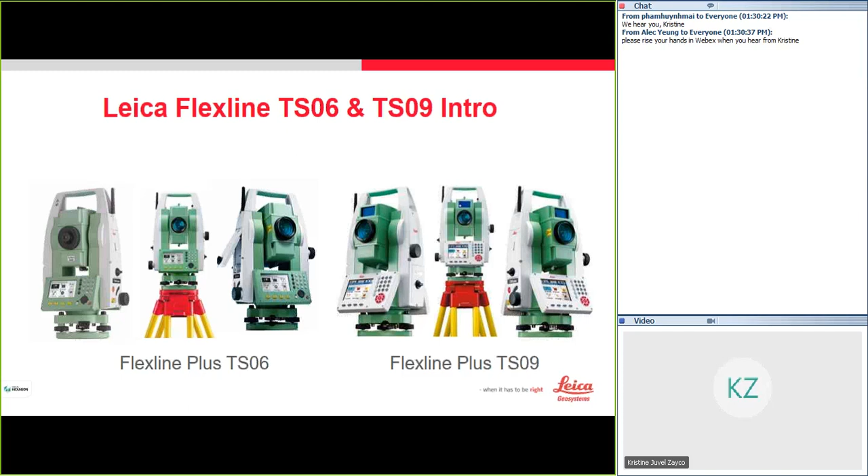So I have put here the reasons why we choose Leica Flexline Plus. The first reason is true quality. What does it mean? It covers the product design, which is made with high robustness due to the specific and dedicated product design, optimized for surveying and construction segments with the highest reliability, and it has high quality Leica optics.

The other thing is the experience. Being Leica, we have close to 200 years of experience in manufacturing world-class surveying equipment. And the other thing is true global coverage. With our 250 support and service centers, we are covering every continent, so we make sure that all our customers are really taken care of when they need us.

There are our support and information hotlines also. We have our regular training courses, informative seminars, and we do web broadcasts, just like what we're doing right now. The other reason is we have customer support, which covers every continent, with 250 support and service centers covering the whole world.

So to continue, now we're covering the hardware features, like the Flexline TS06 and 09. They have electronic distance measurement, the EDM range with prism up to 3,500, with an accuracy of 1.5mm as I mentioned previously, and the measuring time is 1 second.

For non-prism, we have a range of 500 meters, and they could also choose a long range option of 1,000 meters with an accuracy of 2mm plus 2ppm. The measuring would depend on the object, the observation situation, and the environment conditions.

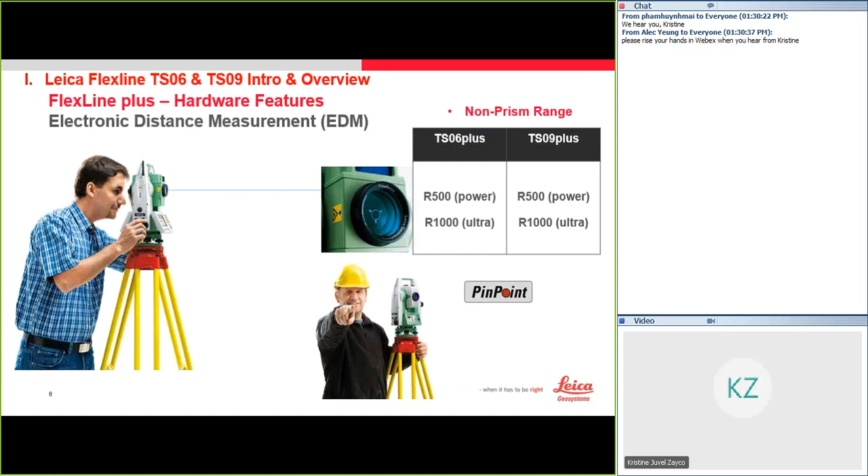Another advantage of our EDM is the non-prism pinpoint technology. When we say pinpoint technology, what does it mean? It means that wherever you point the laser, that's where the reading comes from. You can measure walls, corners, and even inaccessible points without any special applications.

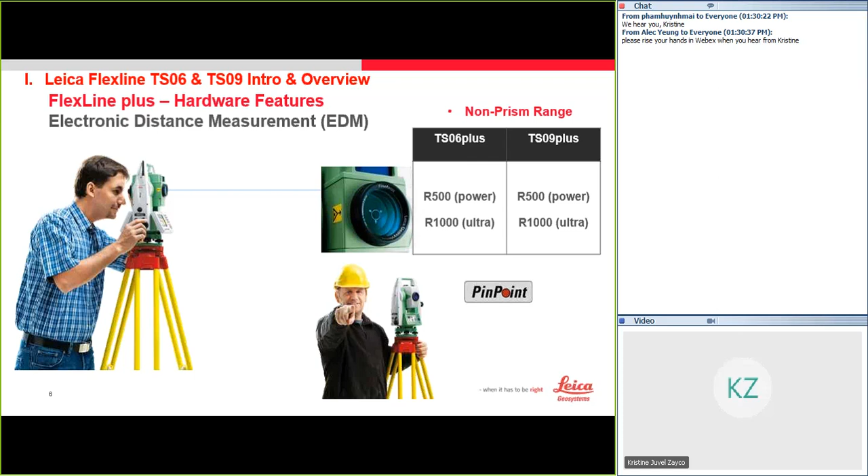We have the highest degree of pointing and measurement accuracy, the smallest laser dot, and we can always rely on it when measuring in the hardest conditions, like rain, fog, snow, and even with multiple targets. So far it is the market's best EDM in combination with range, accuracy, laser dot size, and measurement time.

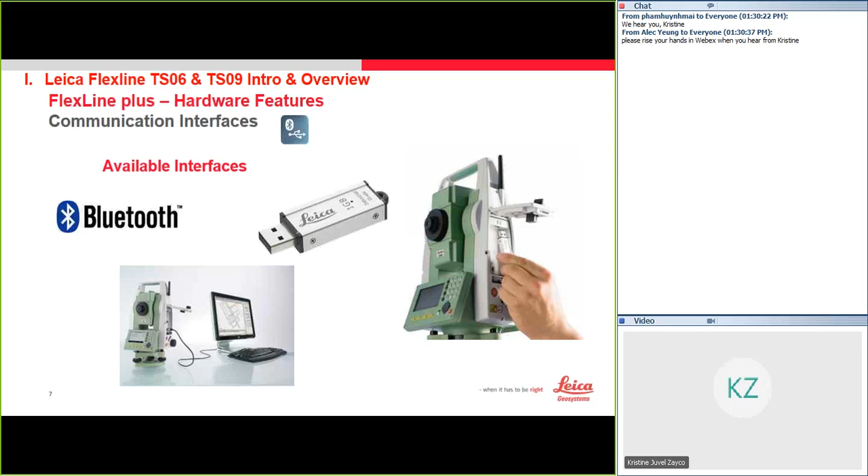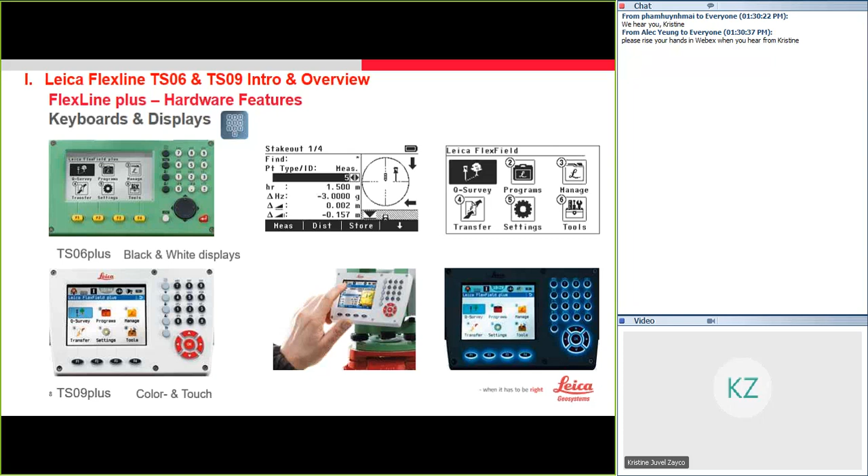So the other additional features are this. As you know, it has two function trigger keys, which allow you to measure and get all the distance at the same time, and of course the two user definable keys, so you can define the keys that you always use. And of course our endless horizontal and vertical drive, and even the IP55 also. So these are all the additional hardware features in our TS06 and TS09.

Hello, sorry for that. The other additional feature is the theft protection. This additional feature is for security reasons. So how does it help our customer? This prevents an unauthorized person from using the instrument, and your data will be protected also, and it makes your instrument unattractive to steal, or even lowers your insurance cost for this instrument.

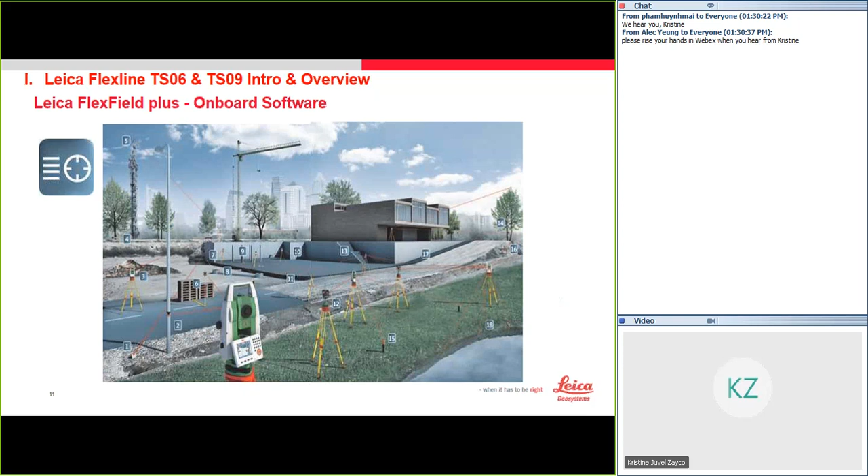So let's continue with these applications, the onboard software. I won't go through all these apps, but just some basic ones that most surveyors use. The station setup is a program for when you want to set up your station, to determine your station coordinates and your station orientation. In this station setup, you will have a maximum of 10 unknown points that can be used to determine the position and orientation, using different methods.

The other thing, of course, is survey. Survey is a program you use if you want measurement of a limited number of points. With this, you need to do the pre-setting for the job, station, and orientation prior to beginning your survey.

The third one that I want to explain more is the stakeout program. This is a program used to place marks in the field at predetermined points to be staked. These points to be staked may already exist on the job, on the instrument, or can be manually entered also. The program continuously displays the difference between your current position and the desired stakeout point, so you can see how far you are from the stakeout point, or whether you are already on that exact point.

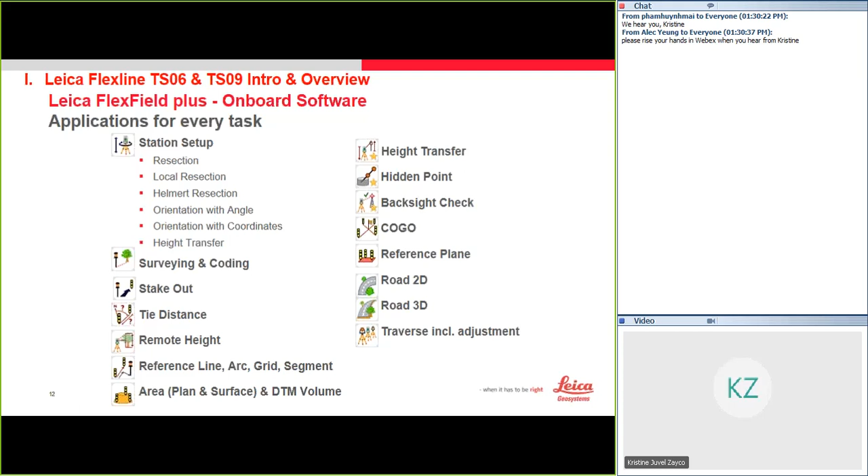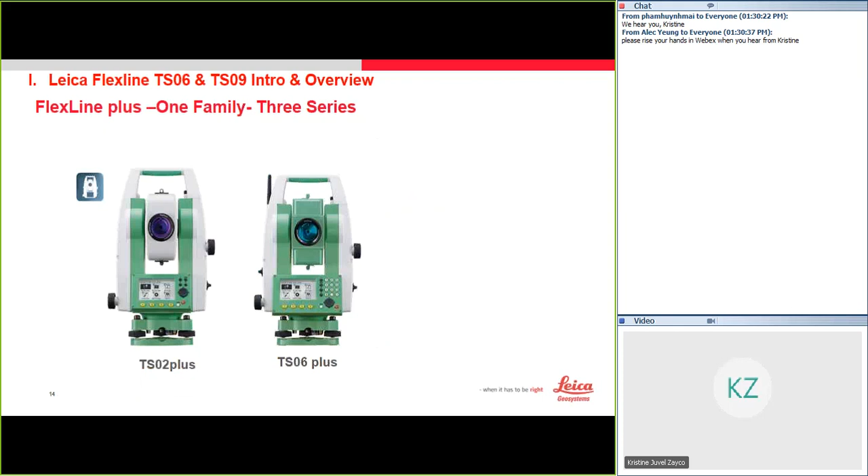I won't go through all the applications onboard, so let me continue to the Flexline Plus, which is one family with three series. Looking at this product series, we could see how it evolved, from black and white with a simple keyboard to a colored display and alphanumeric keyboard. This is the evolution or development.

So one of the reasons we use Leica Flexline is the true flexibility, even for the affordability of customers. If you have a tight budget, you can use just simple feature requirements, then you can have the range of TS02 to TS06. If you have higher requirements and a better budget, then you could choose the TS09 Plus.

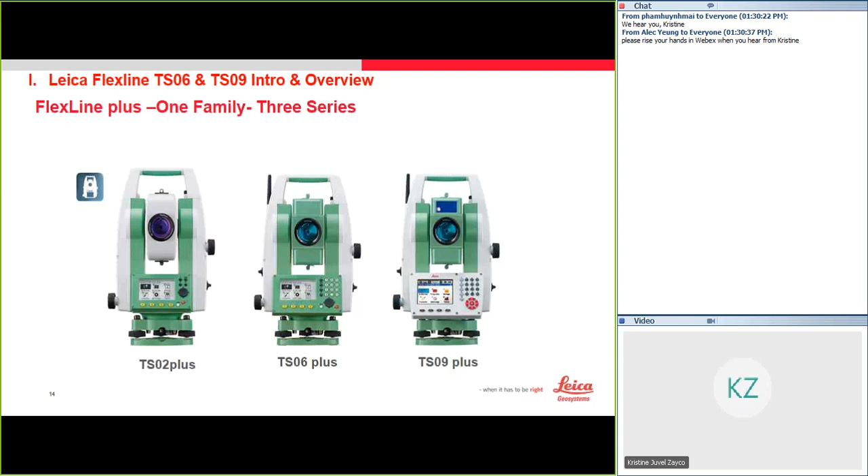So let me describe each of this family. The first one in the series is the Leica TS02. It has the minimum features among the three, but that doesn't mean the quality and precision are not there. It's Leica quality with proven specifications, a reliable instrument, and the highest EDM precision also.

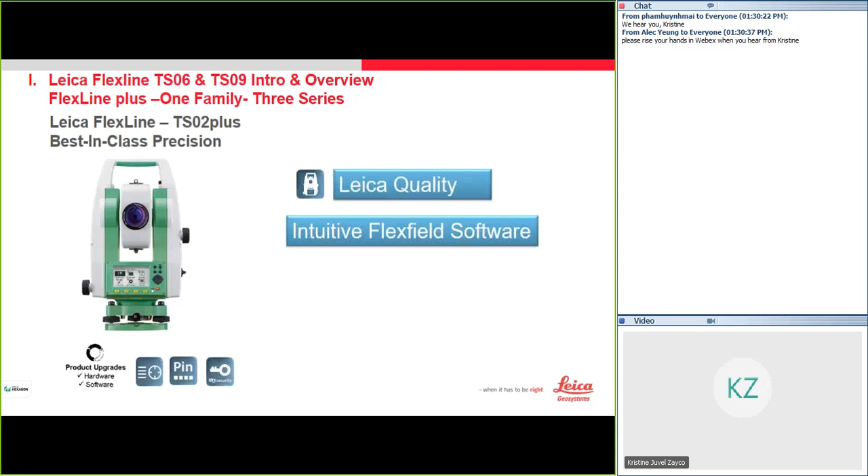TS02 also has this intuitive FlexField software, which means a low learning curve due to the guided workflow and easy to understand graphics and icons, and faster operation due to the graphics. The keyboard uses the standard minimum number of keys for maximal overview. So this is the Leica Flexline TS02.

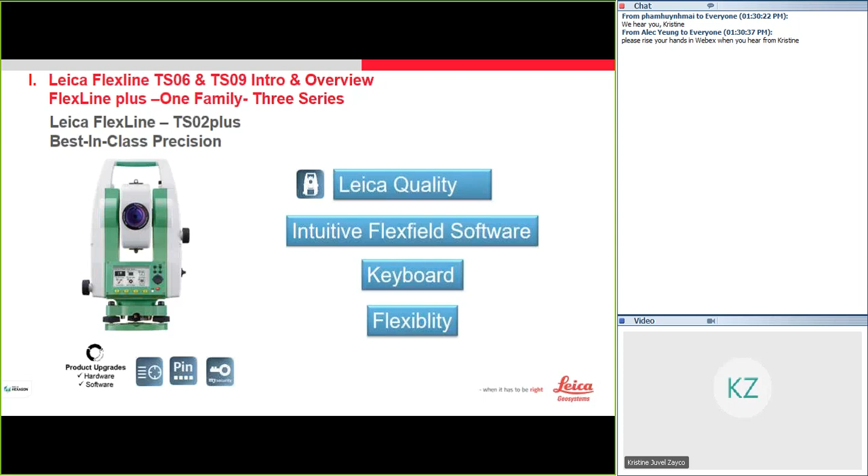And of course, it's flexible, so you can choose from various hardware and software options.

So the next in the family series is the TS06 Plus, which we call precision with high efficiency. It covers the FlexField software, meaning it has an enhanced application package with optional applications, depending on your requirements or the end user's requirements. The hardware also has an advanced black and white keyboard which is fast and error-free because it's alphanumeric.

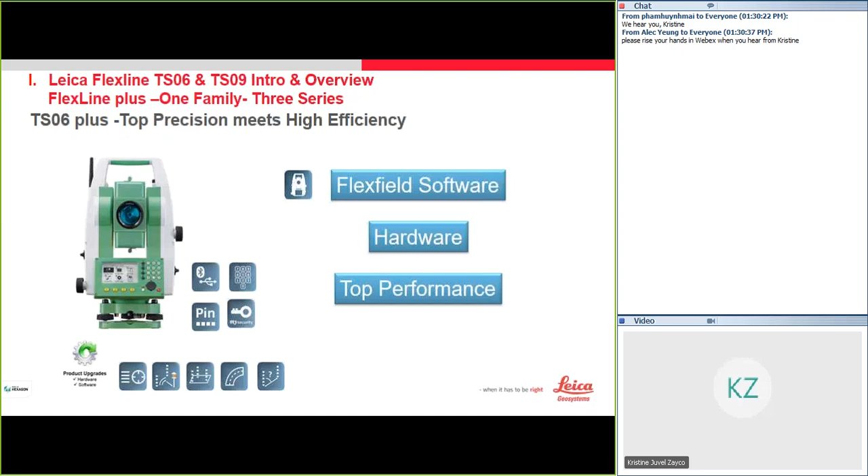It also has an enhanced hardware package which includes USB, Bluetooth, and a reflectorless range of 500 EDM or even 1000. It has angular accuracy from 1 second to 7 seconds. We call it top performance because it has high speed and highly accurate EDM, as well as high angular accuracy. This is the second in the family series, the TS06 Plus.

So the last one, and the highest among them all, is the TS09 Plus. This instrument includes the same innovative FlexField software, an enhanced application package, and hardware with a colored touchscreen keyboard for convenience, plus top performance. It's flexible, so with the model you can have everything onboard, prepared for any task in the field. This is the TS09 Plus, the last one in the family series.

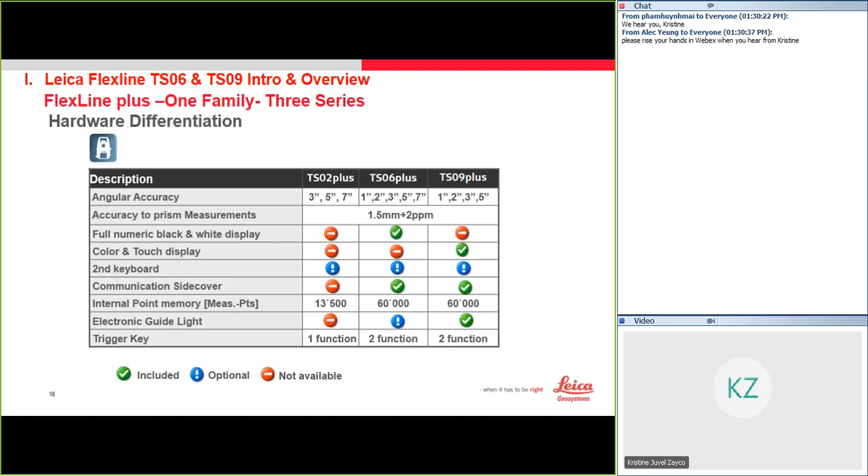So we may come to another subtopic, which is what's new with the version 6 Flexline Plus firmware. So we have this tunnel application. So what is the tunnel application? It's an onboard software program for tunnel measurement on Flexline Plus, TS06 Plus, and TS09 Plus also. So it makes tunnel surveying much more efficient.

With this wide range of functions, it will cover the design, the execution process, and even compute the cut and fill areas. This app even enables you to have full control in the tunnel, even in caverns or infrastructure galleries. In addition to this onboard software, we also have the tunnel office platform. This app is like an all-in-one bundle that makes tunnel surveying easier and, as I mentioned, more efficient. So I'll be playing the video.

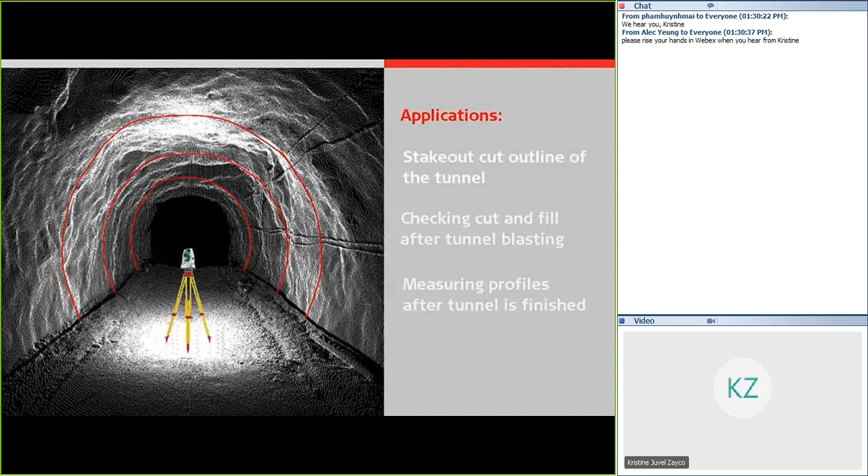This is an overview of the tunnel application available on Leica Geosystems Flexline Total Stations. The tunnel app offers a wide range of applications, such as staking out the cut outline of the tunnel, checking cut and fill after tunnel blasting, and measuring profiles after the tunnel is finished. The tunnel app is available on the Leica TS06 Plus and TS09 Plus from firmware version 6 onwards.

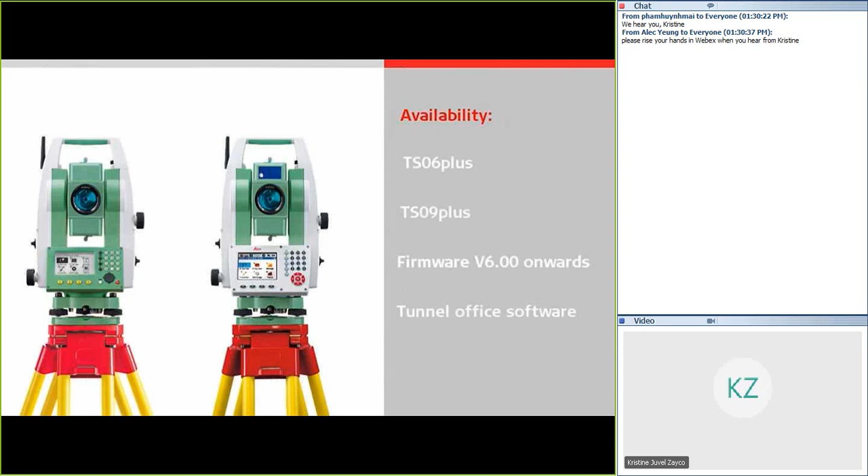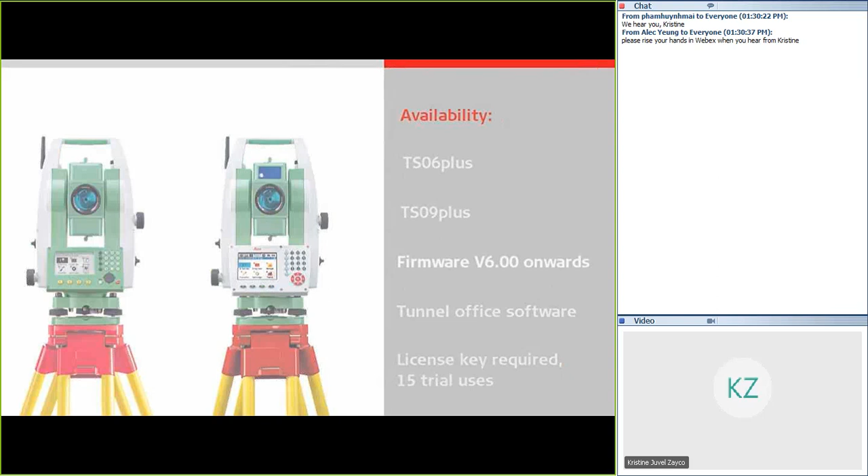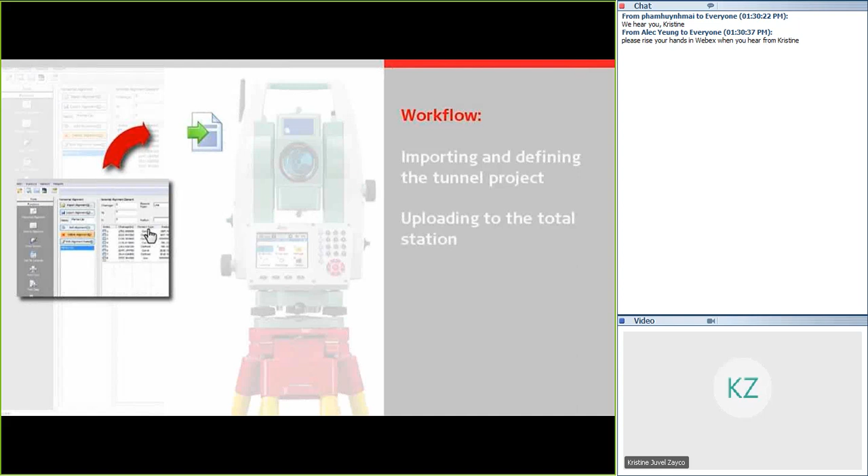In addition to the onboard app, tunnel office software is also provided. To use the onboard tunnel app, a license key is required. However, the app will run in trial mode for the first 15 uses without needing a key. In the rest of the video, the following workflow will be described: importing and defining the tunnel projects in the tunnel office software, uploading the tunnel projects to the total station, using the tunnel app on the total station, and exporting the measurements into the tunnel office software for further analysis.

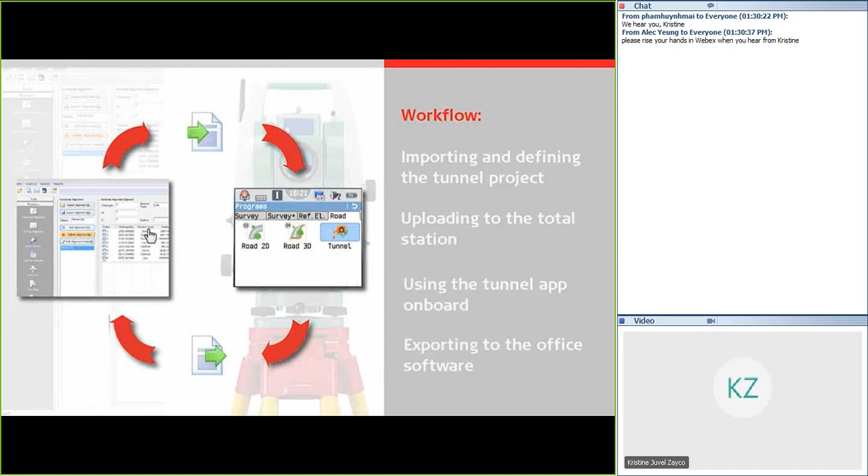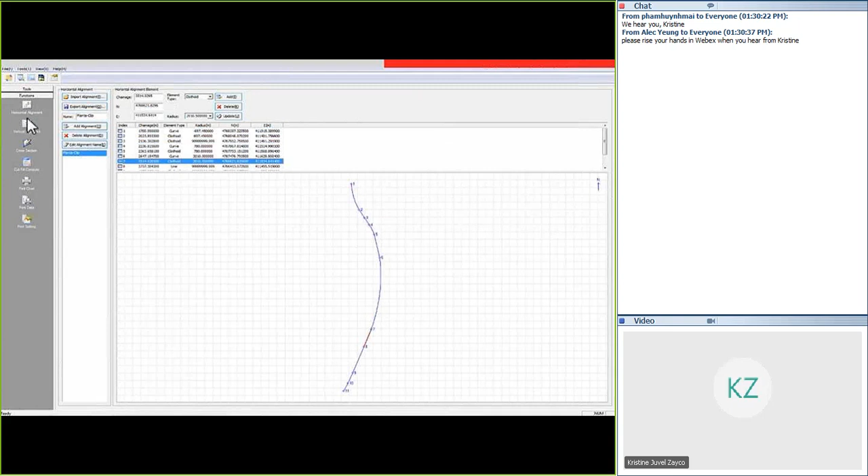To start the tunnel office software, double-click on the tunneloffice.exe file. On the left side, there are various functions and tools available. Clicking on horizontal alignment, you can import the horizontal part of the alignment by choosing an XML file. Once imported, we'll see a graphical view of the alignment, as well as the details of the alignment elements. For the vertical part of the alignment, it is similar. Import the vertical alignment XML file and check the graphical view and the details of the vertical elements.

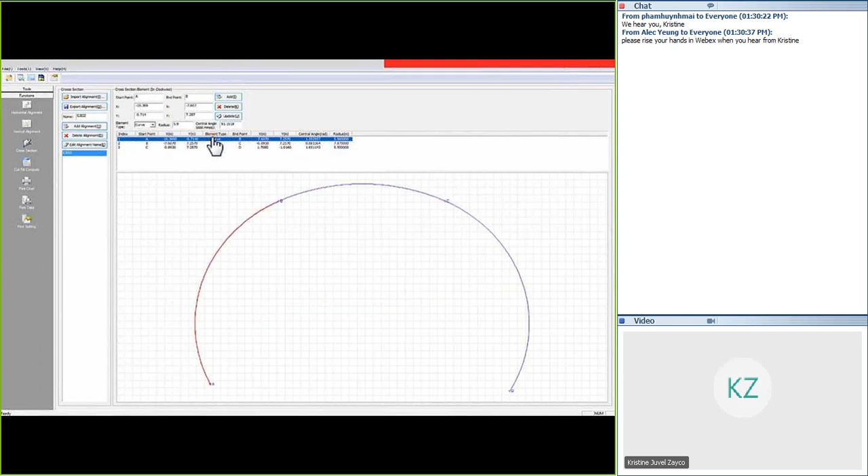Finally, access cross-sections for the tunnel profiles. Import the XML file containing the profiles and check the profile details graphically or by element. To upload your tunnel project to the total station, you can use the data exchange tool, which is included in the Office software, or transfer the files via a USB stick. Let's see how to upload the files via a USB stick.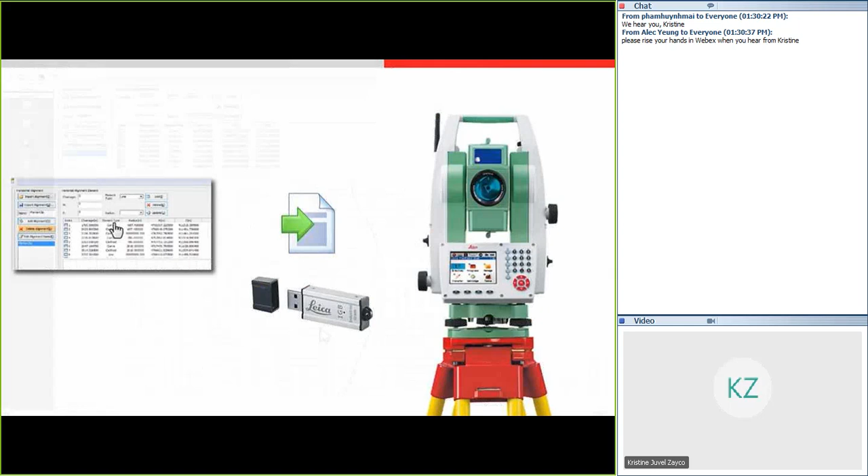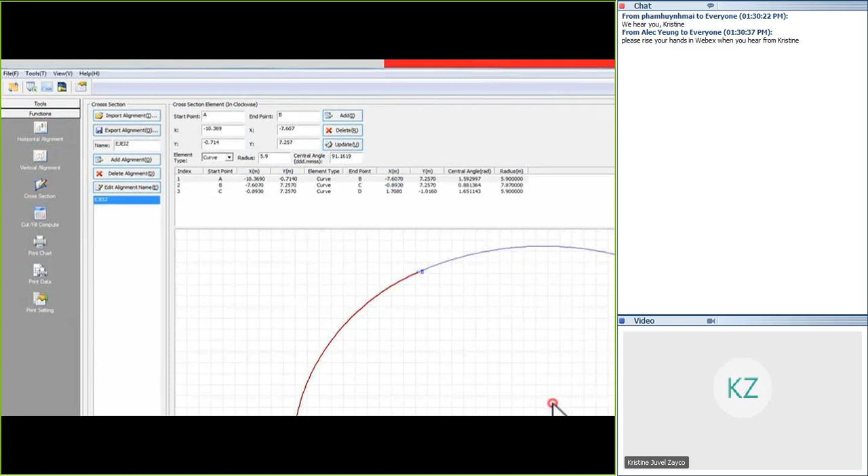Go to horizontal alignment, then export alignment. Save the horizontal alignment with the name tunnel. The correct file extension gets added automatically. Now repeat this for the vertical alignment and the cross-section, creating 3 files with different extensions. Next, copy these files to a folder called tunnel on the USB stick and insert this into the instrument.

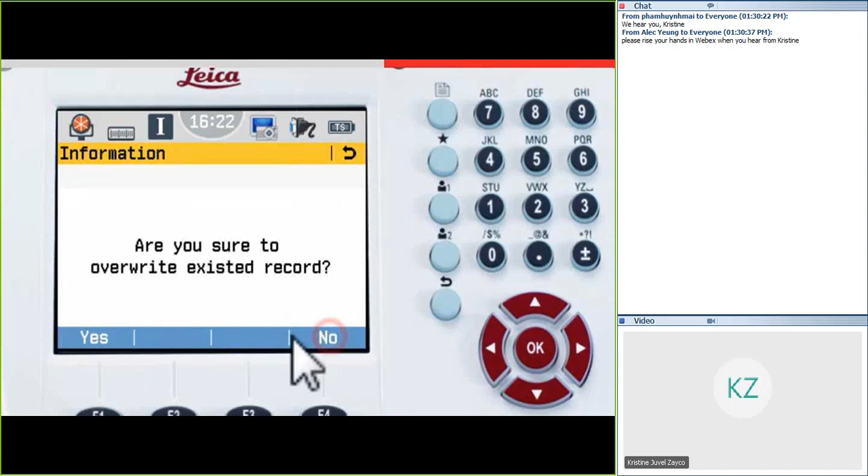Onboard the total station, go into the tunnel app and access the data transfer menu. Choose upload and USB stick, and then choose the part of the alignment to upload. The horizontal, vertical, and cross-section profiles all need to be uploaded individually. Note that only one tunnel design can be loaded onto the instrument at any one time, so uploading new files will overwrite existing design data.

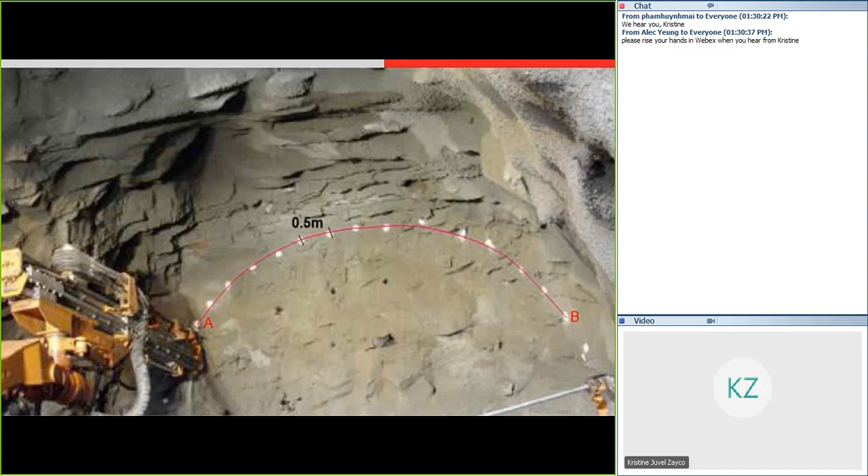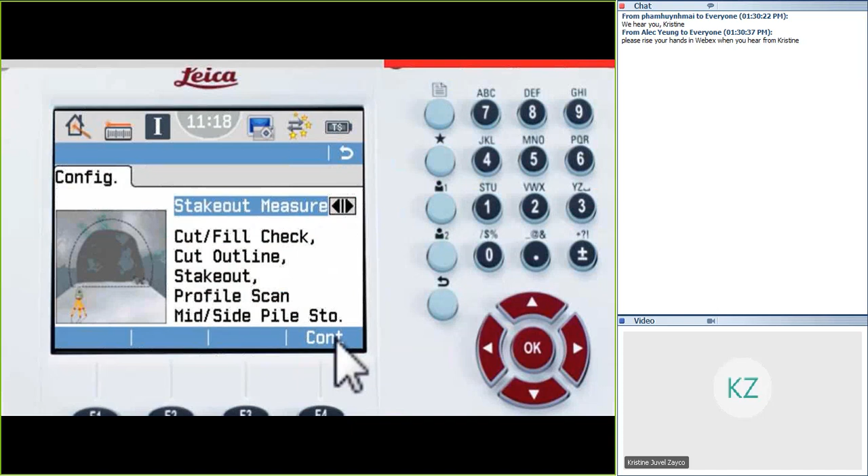Imagine you need to stake out the profile where the tunnel should be drilled and blasted. We will look at how to define the drill spacing and offsets which define the profile. Here you can see the first element of the profile drawn from A to B. We want to stake out every 0.5 meters along the profile. Choose Stake Out Measure from the main menu. Define whether the profiles are tilted or vertical, and then choose Cut Outline Stake Out. Choose the appropriate cross-section to stake, and then enter the drill spacing required. If there are no offsets required, press Set.

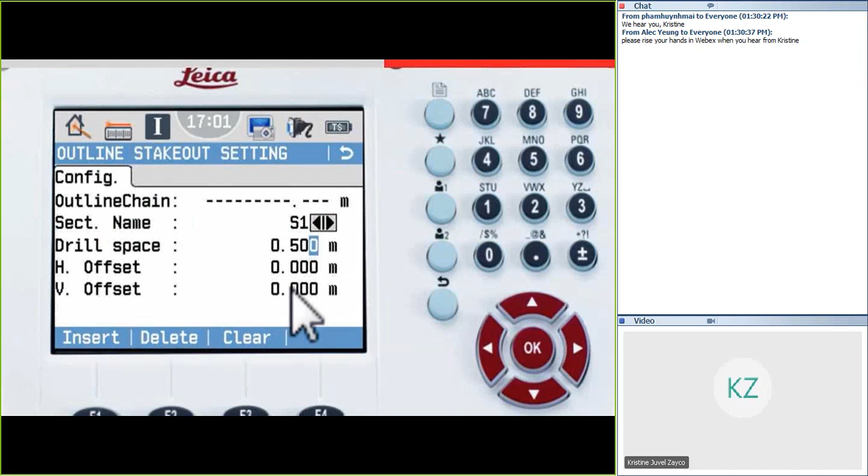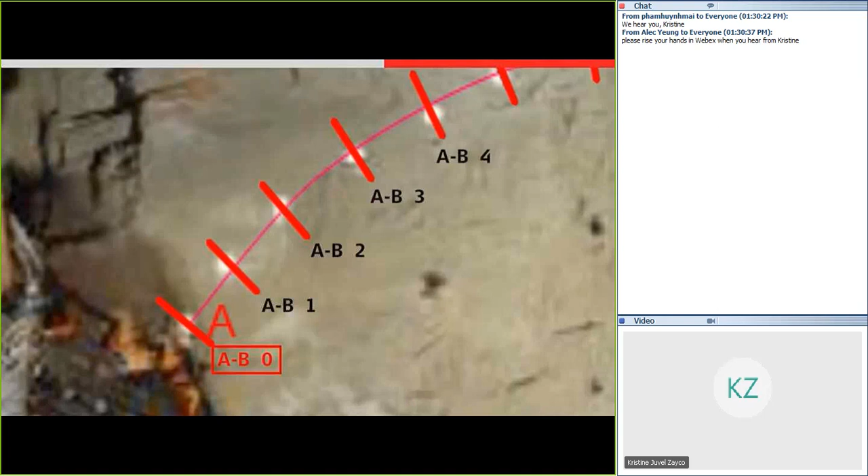In the point number field, choose which element of the profile to stake out. The letters indicate the start and end of the profile element, and the number is incremented according to the drill spacing. Take a distance to start the stakeout. Horizontal and vertical differences are shown, and the point is staked out correctly when these reach 0. To move to the next drill point, with a distance measured, increment the point number and start the stakeout process again.

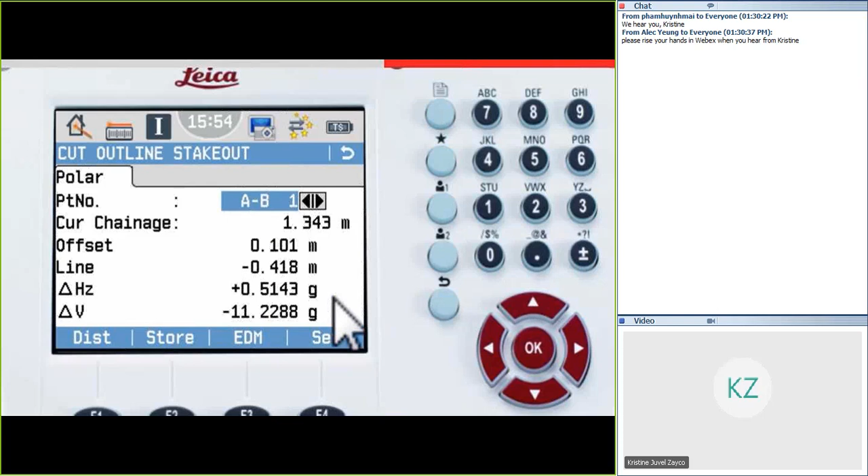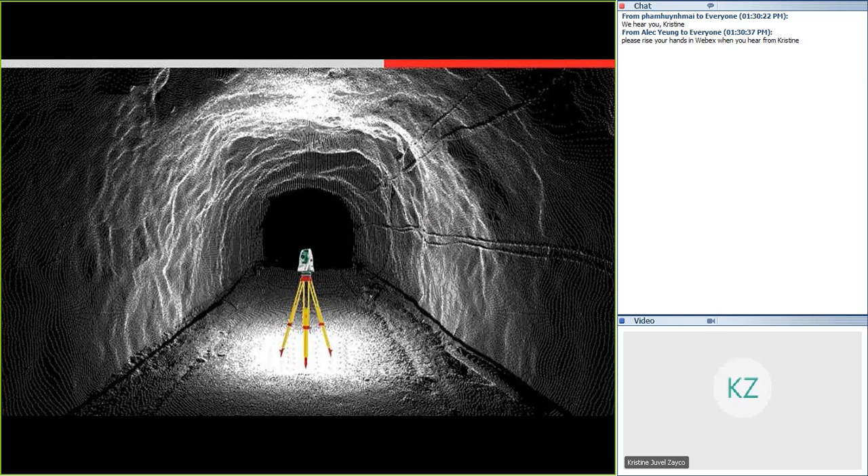Imagine the tunnel has been blasted and you need to check the cut and fill in order to see if you are above or under excavation. Choose Cut Fill Check from the Stakeout Measure menu. Choose the appropriate cross-section to check, and then take a distance to start the stakeout information.

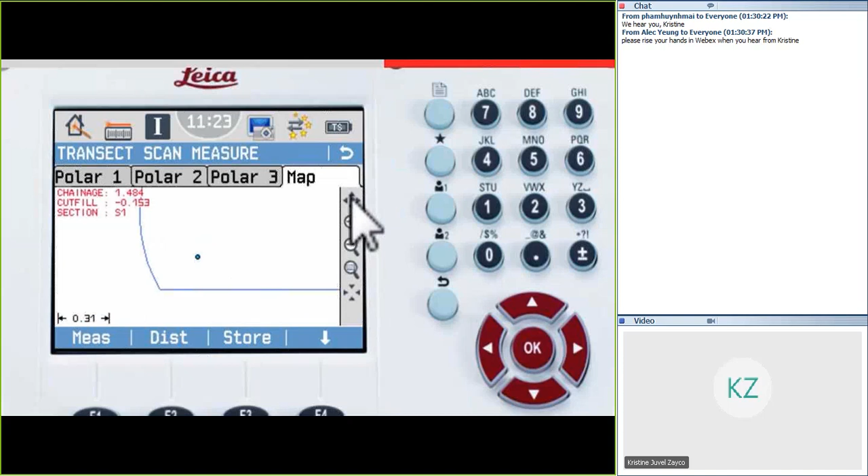Here in the map view, we see the design cross-section and the measured position, in this case indicating an overbreak and showing the basic information in blue. Now the measurement indicates an underbreak, showing the information in red. Interact with the map by panning or zooming to get the best view. Or switch to the other pages to input further information or readouts of the stakeout values.

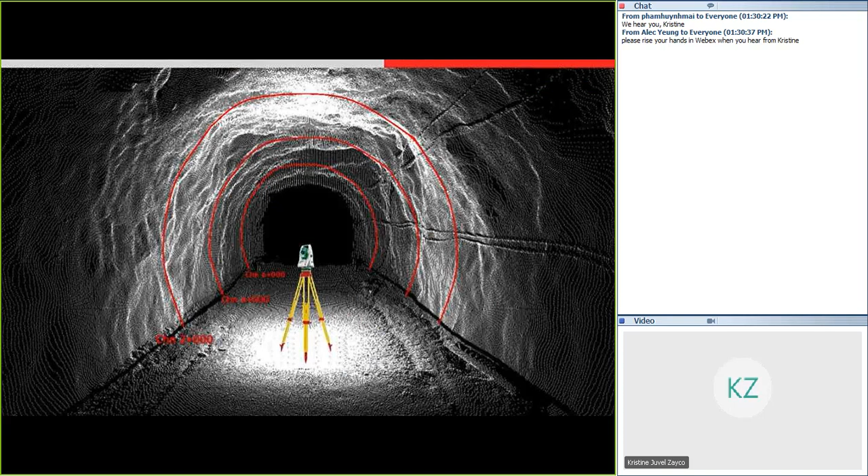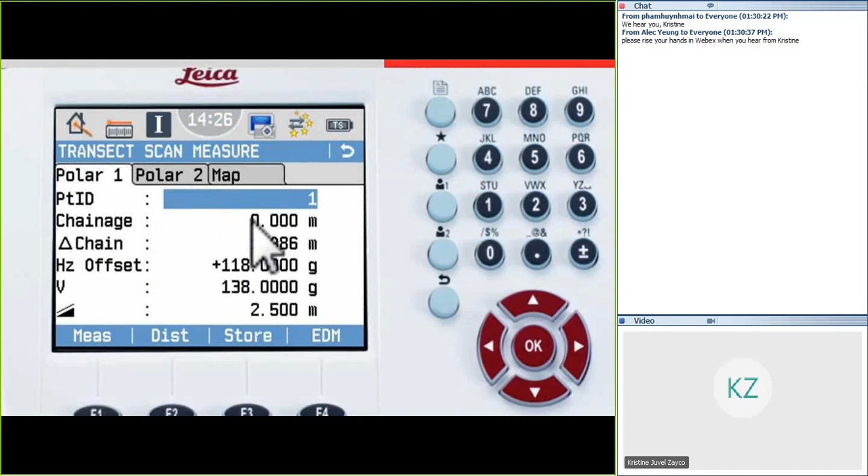Imagine the tunnel is now finished. We now have to scan a series of profiles for quality checks. In this example, we need to check the profile every 2 meters, starting at chainage 2. From the Stakeout Measure menu, choose Transect Scan. Enter the chainage that we're going to scan. Measure a distance at the start of the profile to start the process.

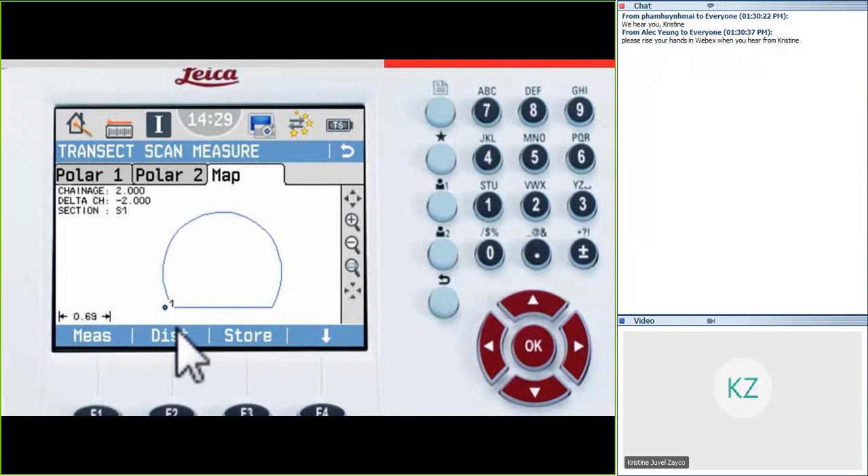The instrument is measuring correctly at the profile once the chainage difference is close to 0. The profile points can then be measured and stored. Point the instrument and repeat the process until enough points have been measured to analyze the profile. The measured points are stored in the memory, ready to be exported to the Office software for further analysis.

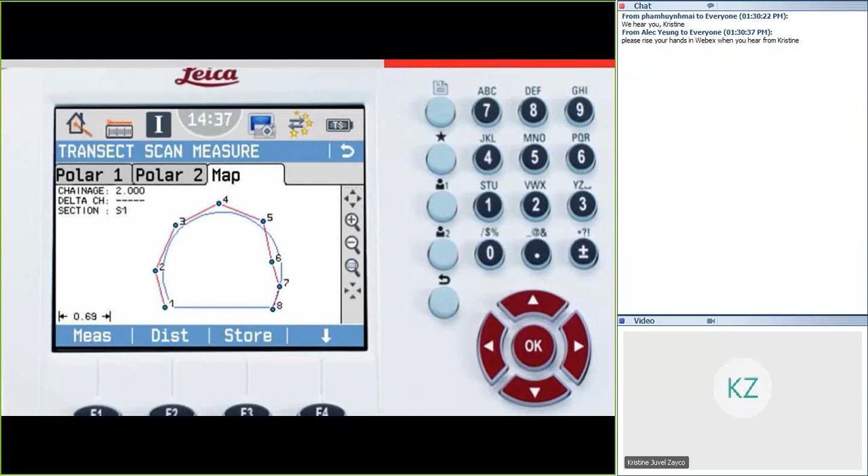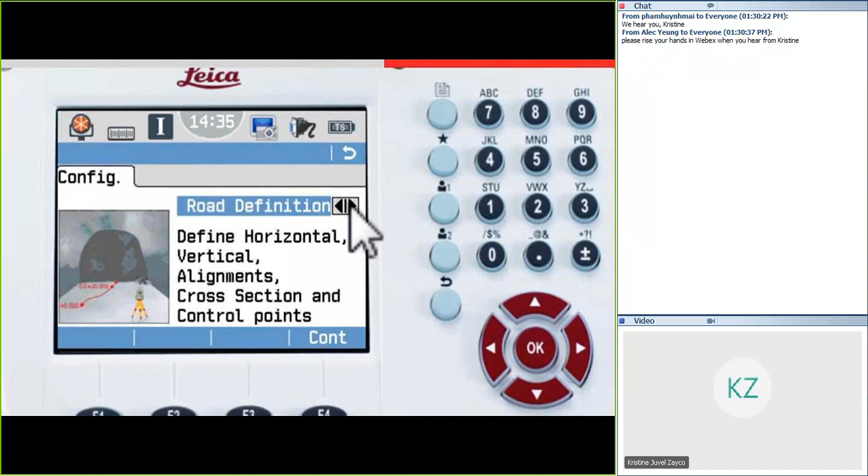After the field work is completed, you might want to export the measurements for further analysis or documentation reasons. From the main menu, go to Data Transfer. Choose to download to a USB stick, for example. Choose which data type to download, in this case the profile scans, and then OK to transfer your data to the USB stick.

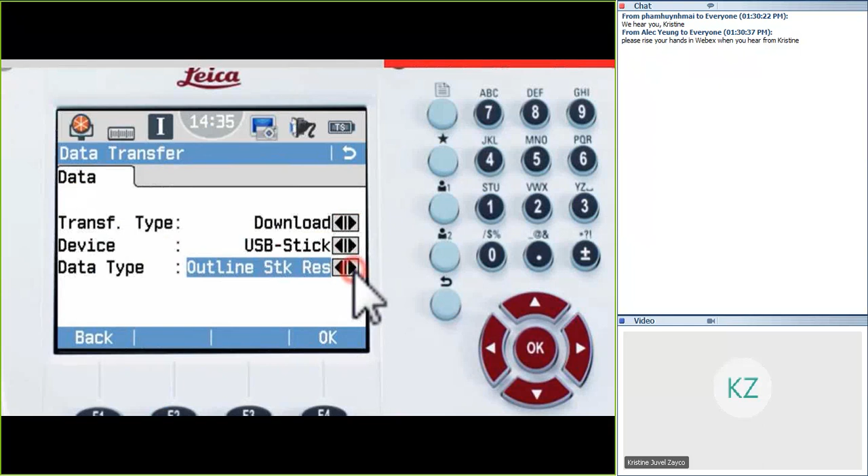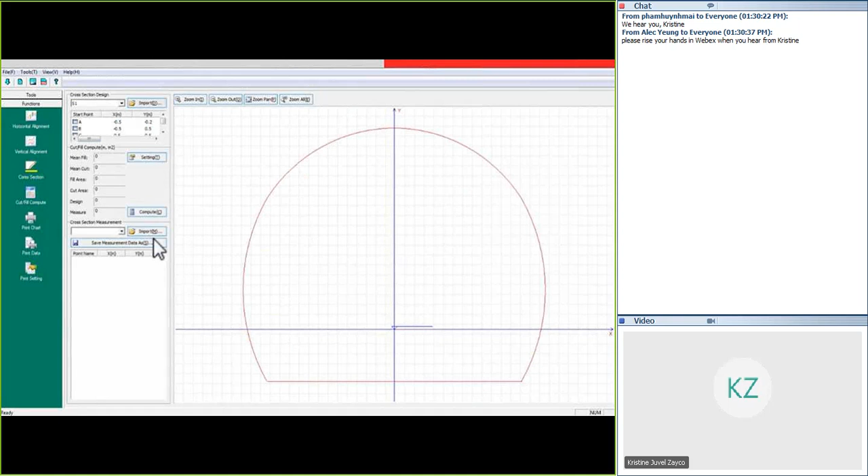Back in the Tunnel Office software, to check the profile measurements against the design, go to Cut, Fill, Compute. First, import the tunnel profile design by going to Import D and choosing the tunnel cross-section file that you previously uploaded to the instrument. Then, to import the measured data from the USB stick, go to Import M and choose the OPS file on the USB stick.

The imported scanned tunnel data is overlaid onto the project cross-section and displayed in the view. To compare the measured data with the design data, choose the correct cross-section chainage and press Compute. The overbreak or underbreak values are computed and displayed.

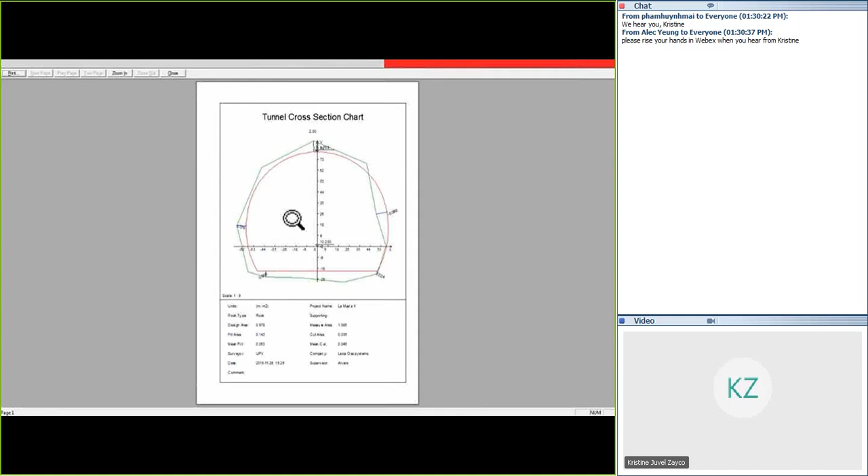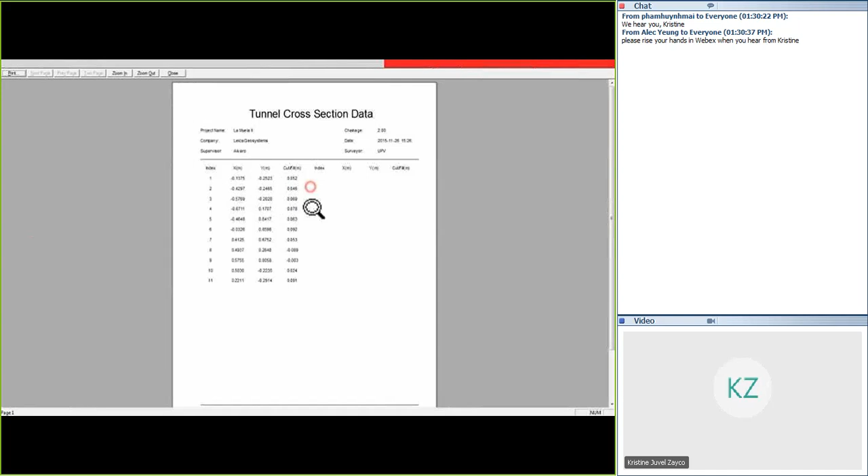Go to the Print Chart option to print out the graphical cross-section comparison into an easy-to-view report page. Or go to the Print Data option to print out the difference values in a more tabulated form. To save the information as another format, such as a spreadsheet, image, or DXF file, use the File drop-down menu.

This video has shown how the tunnel application for the Flexline manual total station series provides a complete workflow from data preparation, staking, checking, and scanning a tunnel to data visualization and analysis.

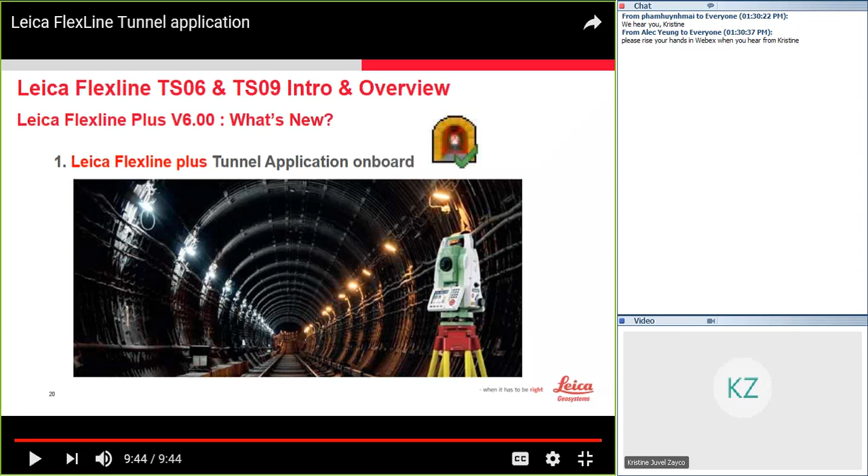So that is the video about the tunnel application on board. So the next slide is the application itself. I believe in the video it has been explained what this tunnel application can do. So of course, as you mentioned, it can manage the data, like control points, horizontal alignment, vertical alignment, and even the design sections also. So the data must be saved on the instrument. After you input the data, they could be verified as well.

So in this tunnel application, as mentioned, you can take measurements, and of course you can check the cut and fill, stake out cross-sections, and you could measure the cross-sections also. In addition, you can browse and delete the measurement results. Then you can transfer data also, or upload the original data and download the stakeout measurements, the results for your horizontal and vertical alignment.

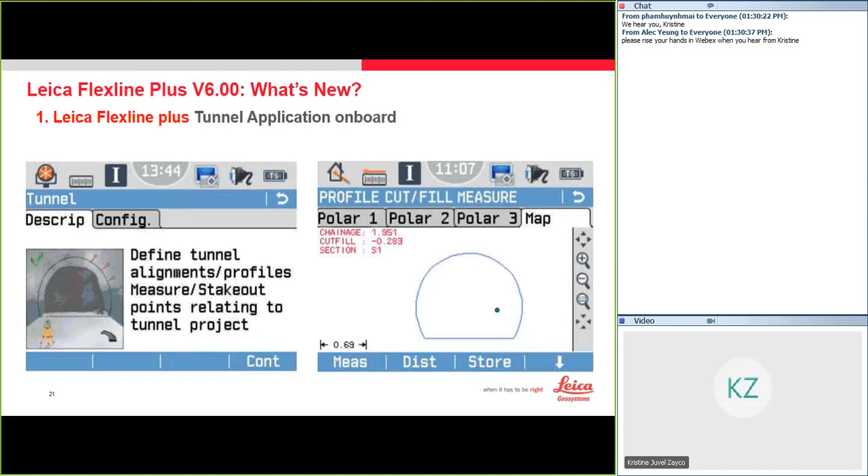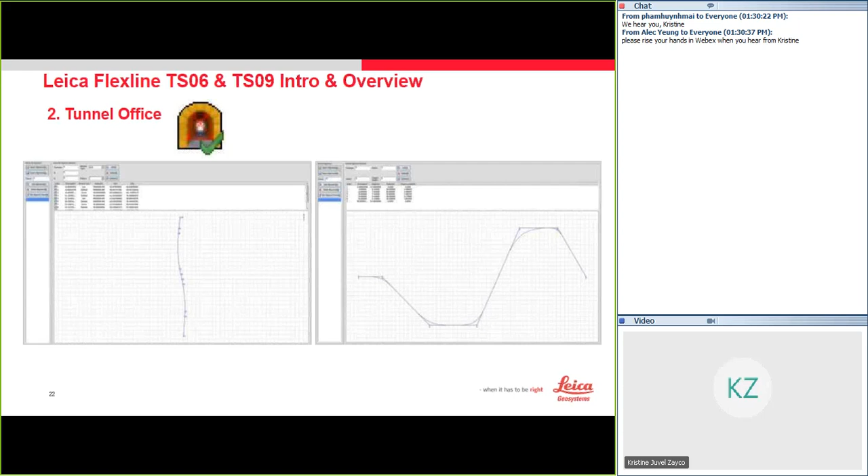And this Tunnel Office we use to print out graphics and also the data. The Tunnel Office software can be downloaded from myWorld, and it can be installed on Windows XP, Vista, Windows 7, 8, and 10 operating systems. This is an independent software, so it doesn't really relate to our Leica Infinity software.

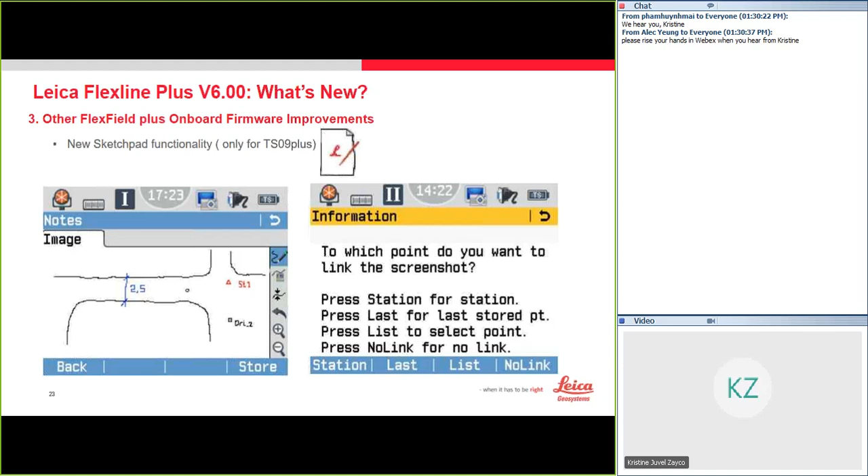So how does it help us in the field? With this new improvement, we don't need to carry a notebook or pen in the field. We can just draw the notes and save them in the instrument.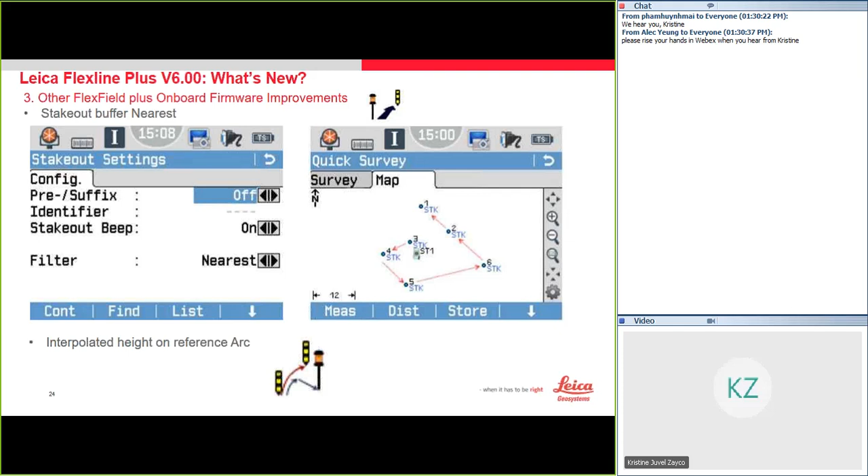So the next improvement is the height interpolation method, which is now available, where all the height values are interpolated along the line.

So the other subtopic that we have is the office software, which is Leica Infinity, for processing our TPS data. Processing is, of course, a paid module which is used to manage the data reduction from TPS. It allows us to edit and reprocess the setup, even the traverses and sets of angles. So these are the workflows that we can do in Leica Infinity in the processing of TPS data.

We can import the TPS data. We could edit the setups, we could edit the TPS observations, we could create and process the traverse, then we could create and process the traverse using sets of angles data, and even we could manage sets of angles, and also you can produce a report from here.

Now we are in the second part of our session, which is the feature, benefit, and value. So how do we use this in a sales pitch to the customers? So that your customers or the end users know what these are, or understand how a certain feature can bring an advantage to them, and even how this advantage can bring savings to them also. So let us find out more about these three important things that we need to deeply understand.